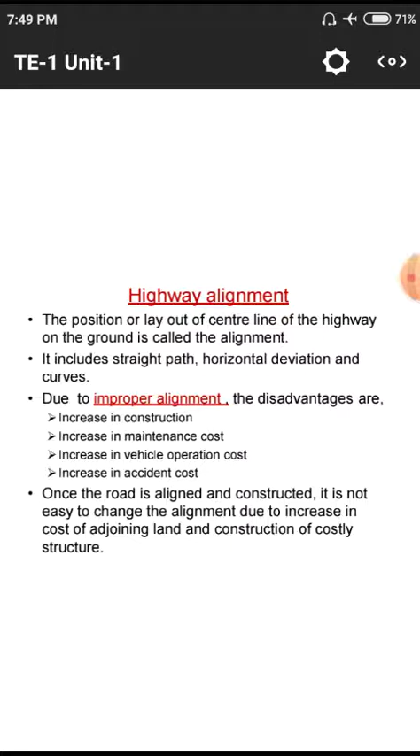And the last one is the increase of accident cost. That means if there is no proper design, no proper maintenance and no proper vehicular operation, those three are the major conditions for these accidents. Okay, to rectify the accidents, we need to maintain the top three conditions. These are the major alignment conditions and disadvantages.

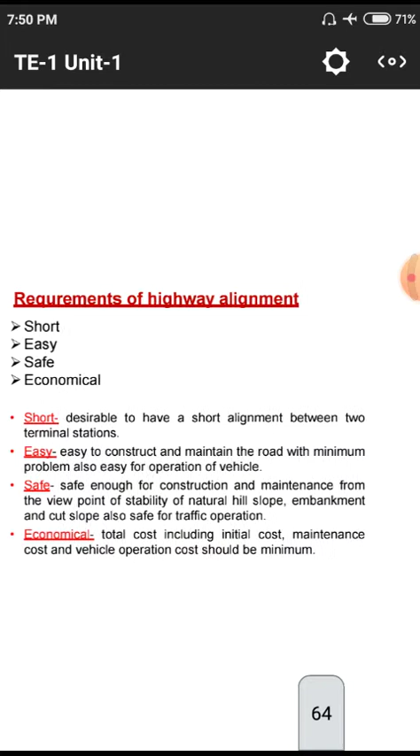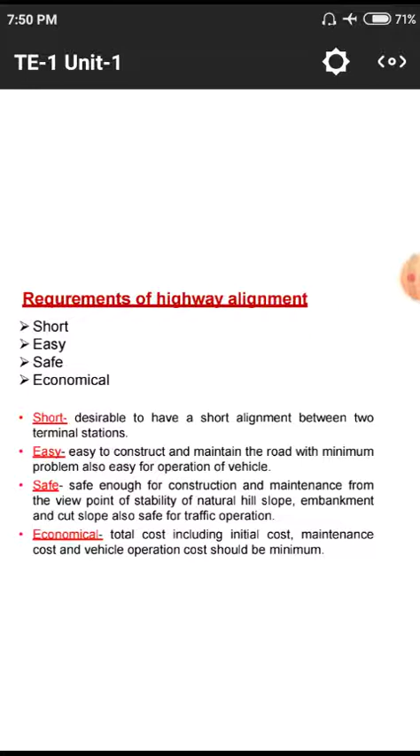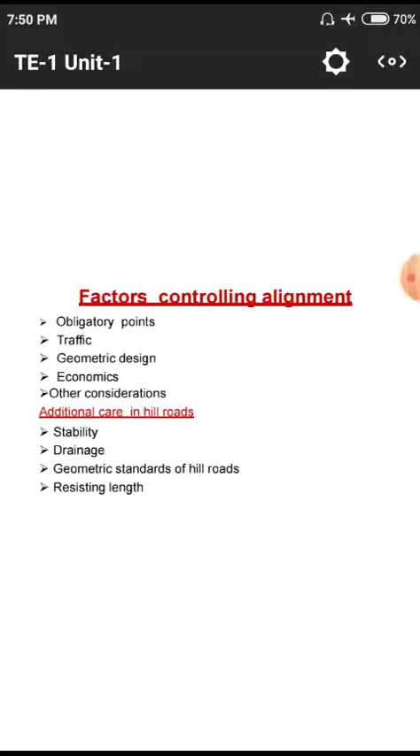Next, requirements of highways: short, easy, safe, and economical. As short as possible, easy to travel and understand, and it should be safe and economical to the users. Next, factors controlling alignments. The first one is obligatory points, different kinds of obligatory points. In the previous class we discussed churches, monuments, temples, and other things that lie beside the roads.

Those are mainly obligatory points to the particular roads. And next one is the traffic. That means origin and destination survey could be carried out by different kinds of traffic. In villages we have traffic majorly due to tractors and trolleys, because tractors and trolleys are the major means for transferring goods from lands, that means lands to their storages and other agricultural markets, so vehicular traffic is more due to these tractors and other carrying vehicles in villages.

Likewise in our cities we have traffic with cars, autos and two wheelers. These are the major traffic-causing vehicles in a city. But in case of national highways, major traffic vehicles are lorries, buses and other containers. These are the major traffic issues on the highway. So likewise we have different kinds of vehicles on different types of roads. Okay, we need to memorize those kinds of roads and types of vehicles which have different traffic values in

that particular roads. Origin and destination survey: before going to construct a particular building or any dam or any other road, we need to take a survey. Survey here is not related to anything else, it's simply related to our civil engineering matter. Before going to construct a particular dam, we need to take a survey of the surrounding villages, because constructing a dam means there can be a huge amount of floods. If floods are coming, neighboring villages will be affected because of the huge amount of water.

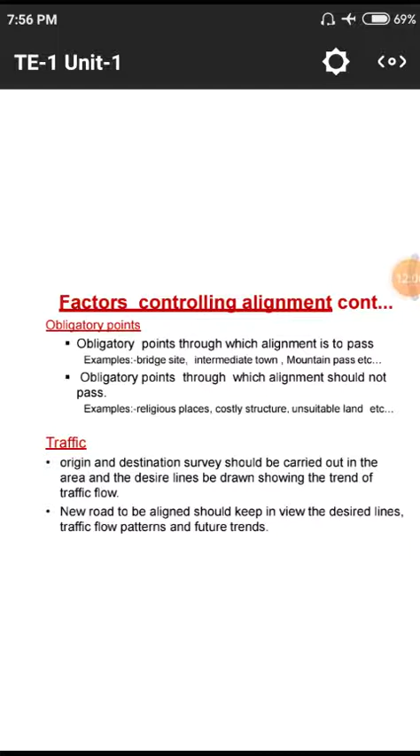Next, we didn't discuss these obligatory points. Once again we will discuss the obligatory points through which the alignment passes, such as bridges, intermediate towns, and mountain passes. In so many previous slides I explained these obligatory points or conflict points.

Whenever we are laying a particular road, if there are bridges and intermediate towns in between two villages or two cities, there are so many villages in between, so a few places in those villages need to be improved in terms of road quantity, so that those villages can be brought under these obligatory points.

Examples: religious places, as previously discussed, huge amounts of temples, mosques, and churches come under these religious places. And next, costly structures.

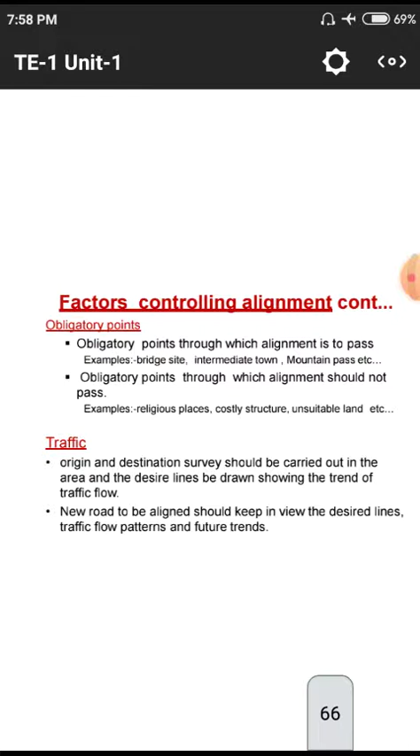Next one, geometric design. In the geometric design we have different kinds of factors we need to consider. First, design factors such as gradient, radius of curve, and sight distance.

First, gradient, that means this is the main slope we need to maintain in case of gradients, such as 1 in 20, 1 in 30, 1 in 40. These gradients need to be maintained while constructing a road, mainly to cater to drainage facilities.

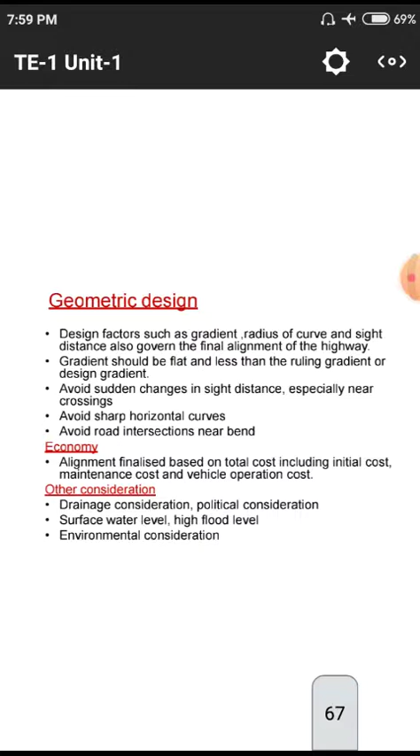And second is sight distance, that means if two or three roads join at a particular point, we need to take care about the sight distance, because if there is no sight distance for a particular driver, there may be a chance of huge accidents occurring. So sight distance plays a major role in preventing accidents, and it is one of the major issues considered under geometric design.

And next, governance of the final alignment of the highway. That means after considering all these points, we need to encounter all those points and fix the final way of these highways, with different kinds of plans for different situations we face while designing.

We need to explain to our higher officials what the obligatory point is, how we faced the problems, and what the minimum length is we are taking at those points. All this we need to explain, because everything depends on finance. Whenever we are getting finance, we are responsible to the higher officials at state level and central level planning commissions, because it's totally a money matter.

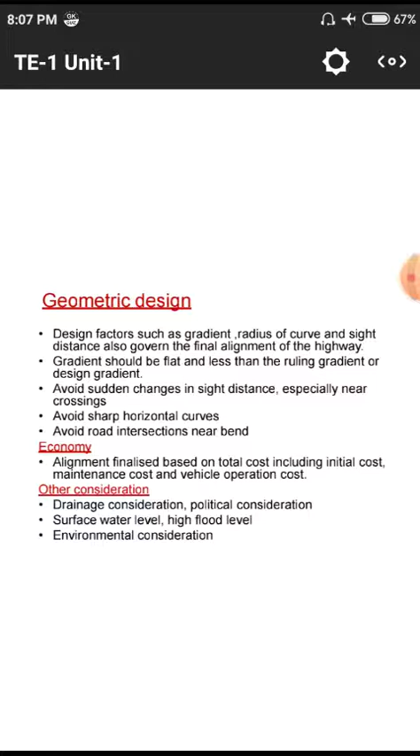We need to have a huge number of trees beside the road, so that whenever there are rains or high temperatures, vehicles and people can take a few minutes of rest on the particular roads. This is the importance of environmental considerations.

Next, topographical control points. Topography means whenever we observe a particular area with the help of drones and other pictorial views, we observe these topographical control points. Mainly these topographical control points depend upon the alignment.

That means whenever we are constructing a particular road, that road may have a huge amount of slope. If there is a huge amount of slope, automatically in rainy seasons the road will submerge with water, so we need to consider these topographical points.

Where possible, we should avoid passing through marshy and low lying lands with poor drainage. This is a major point. Marshy means wetlands, and low lying means the land is below drainage level. Poor drainage practices means without side canals and others, the total water flows on the roads, causing poor drainage conditions.

Whenever we have a road, we need to maintain side canals on that road to drain the water from the topmost surface to other areas.

Next, we need to observe flood prone areas. In some villages, states and cities, we face flood restrictions, like in Kerala. Every year Kerala faces huge amounts of floods. Similarly, Assam and Orissa have flood prone regions. At state and central level, we need to take care of these areas and construct different kinds of road practices to mitigate flood issues.

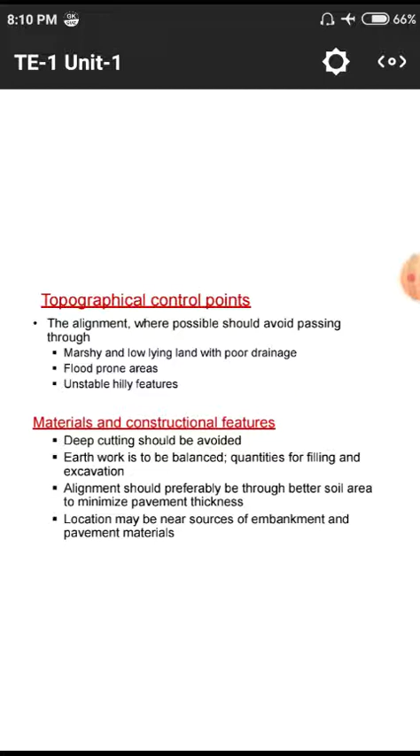Next, materials and constructional features. First, deep cutting should be avoided, meaning sudden turns. Suddenly having different kinds of turns on a road causes huge numbers of accidents. We need to change these sudden turns by implementing radial roads, meaning instead of constructing sudden turns, we construct radial roads so that we travel on a particular radius.

Next, earthwork should be balanced so that quantities of filling and excavation are managed. Earthwork means we need to maintain proper embankments without collapsing the roads, covering earthwork with filling materials and excavating where necessary. Excavation means removal of the top and side layers of earth. These excavation works normally take place in hilly areas to dredge granite and other mining materials.

The excavated material is used for filling on different roads wherever there is a need for filling. The third point is that the alignment should preferably go through better soil areas to minimize pavement thickness.

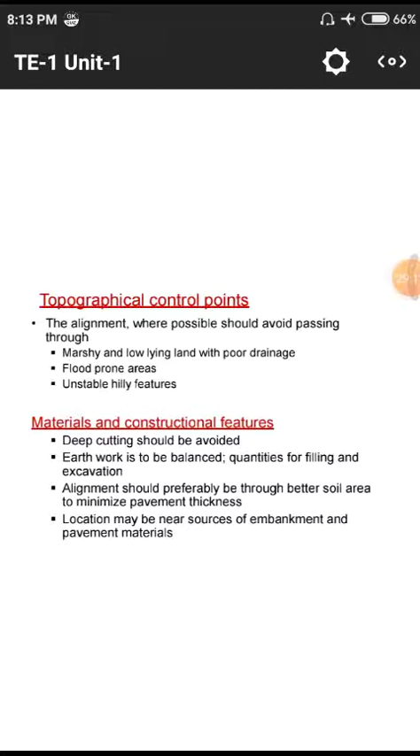Next, the location should be near sources of embankment and pavement materials. If materials are locally available, we reduce transportation charges. If not local, we need to bring materials from other states or villages, and then we face huge transportation charges for construction of embankments and pavements.

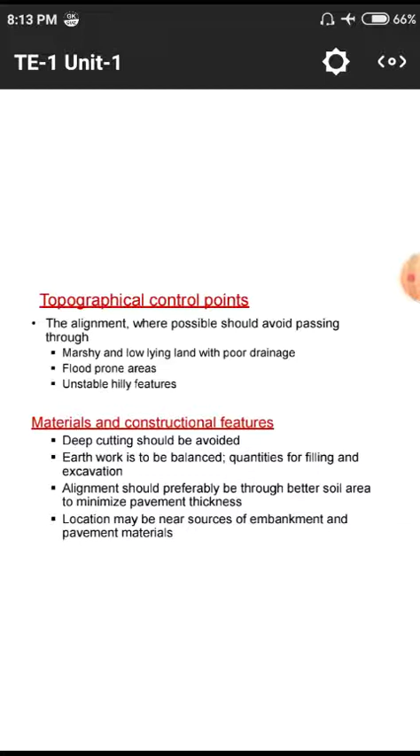Next, we need to do a study on stability. Stability means if there is no stability in our planning, we will have to think through different kinds of actions.

If there is proper stability, we will go on with a particular activity. Like that, if there is particular stability to that land, when we construct a road once, it will withstand for so many years. If there is no stability for that particular land, you need to construct it twice or thrice in its lifespan. That means every 2 or 3 years we need to reconstruct those particular roads because of this stability criteria. It is a common problem in hilly areas due to these gravitational problems and landslides.

Those landslides occur mainly due to gravity. If there is a huge amount of gravity on that particular area, automatically the land will slide to lower lying areas. And cutting and filling of earth for constructed roads in slides causes steepening of slope. Whenever there is a slope, automatically these lands slide due to these gravity actions. So that stability criteria mainly depends upon gravitational principles and gravity rules.

And next one, drainage. We previously discussed it already. We have to mitigate these drainage issues by constructing different kinds of side canals and others, and a number of cross drainage works we need to maintain to minimize the drainage problems.

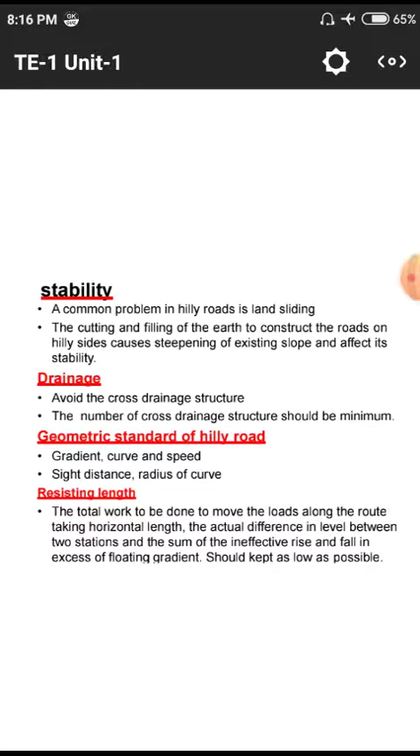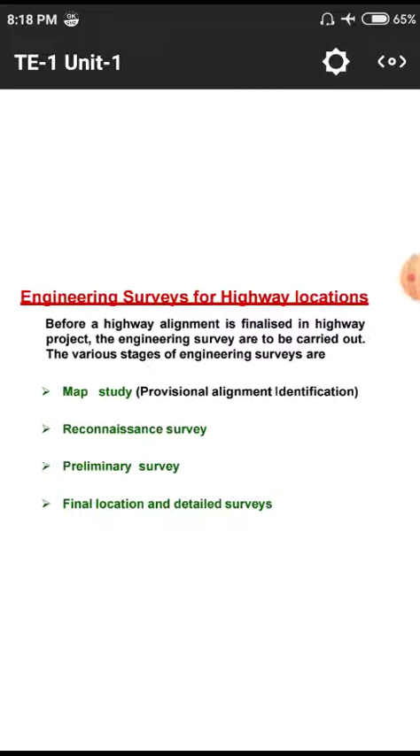This is the map study. Different kinds of rivers, ponds, lakes and other forests, hilly areas, topographical places, monuments, all we need to study by using these map studies. Yes, simply.

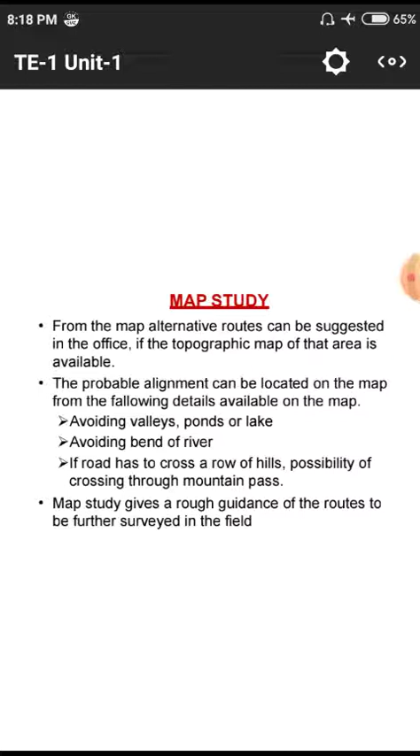And next one, reconnaissance survey. Reconnaissance survey means it will confirm the features indicated by the map, that means different kinds of monuments or any other. To examine those, we need to travel through different feasible points and fix different feasible routes without affecting those. And a survey party may inspect.

Survey party means, it's not a party as in an enjoying party. That means there are 4 to 5 members in that party. They have to visit throughout the length of the road and finalize the points where we have to do construction.

And next one, details collected of the alternative routes during those surveys that a party can prefer, describing the different kinds of routes we need to choose, like avoiding obstructions such as valleys, ponds, marshy land, hills, and permanent structures like temples, mosques, churches, and other obstructions.

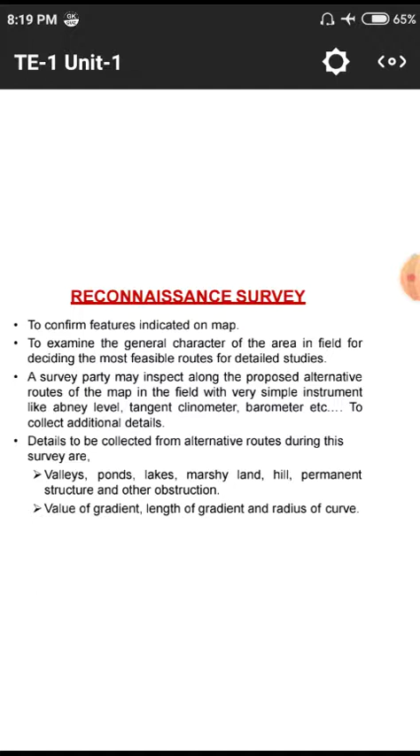If there are any such places nearby, we need to choose those. And the soil characteristics, that means SBC of the soil, safe bearing capacity, and geological features, that means folds, faults, unconformities, and other seismic prone areas. All those come under these geological features. Soil characteristics means rock strata or normal strata, alluvial soil, or any other.

And source of construction materials, what we have in nearby areas. Normally for laying cement roads, we need to know about quarries, like quartzite or any other materials, whether those are naturally available or we need to transport them from other places. We need to check all those conditions and prepare the project report on the merits and demerits of that particular route.

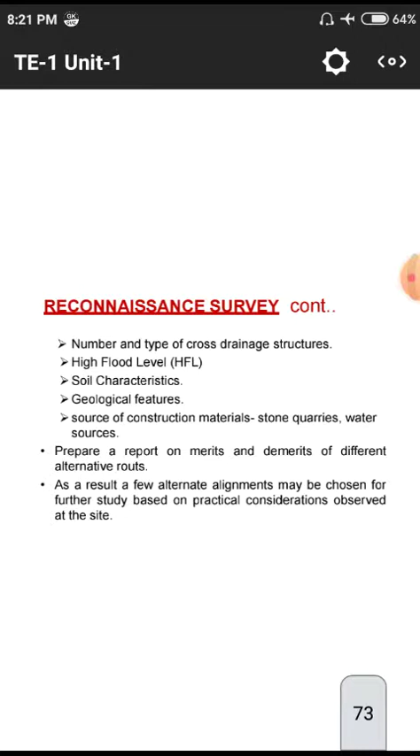Alternative alignments may be chosen for further study based upon the practical considerations observed at the site. That means based on particular conditions, we need to arrange for different kinds of studies. Next one, preliminary survey. Preliminary survey means the survey of various alternative alignments proposed after the reconnaissance and map study, collecting physical information and detailed topography and drainage and soil. We already discussed topographical survey, drainage, all those.

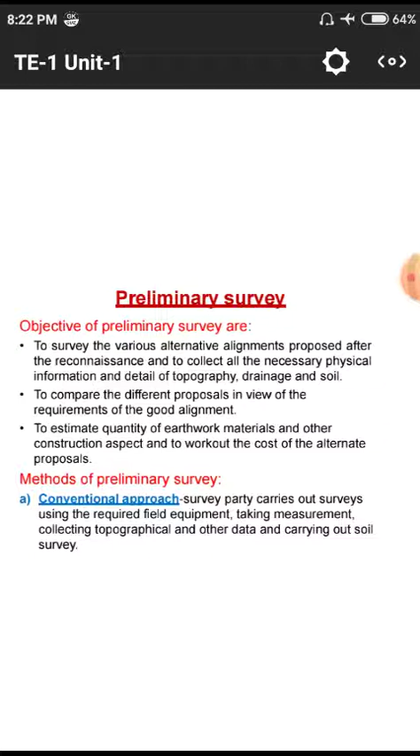Next one is comparing different proposals. Third one is the estimation of the quantity of earthwork we have to do. The preliminary survey has a conventional approach. That means the survey party carries out surveys using the required field equipment, taking measurements, collecting topographical data, and other soil surveys. All those we discussed in the previous slides. Plain terrains, rolling terrains, and hilly terrains, all these terms we will study in survey engineering, with drainage, hydrological survey, and others.

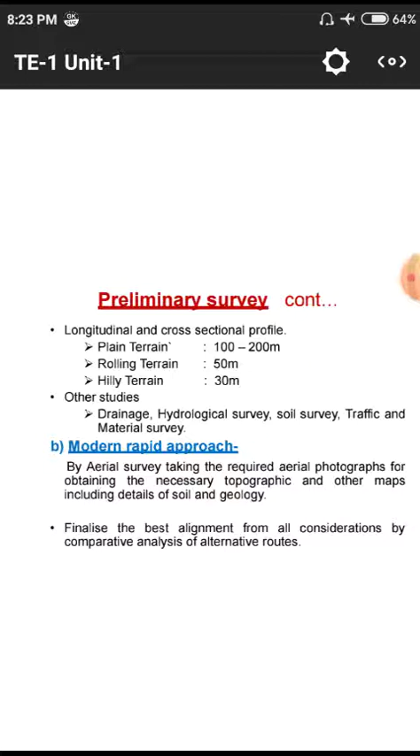Coming to the preliminary approach, the second one is a modern rapid approach. In this, aerial survey takes place with aerial photographs, obtaining different kinds of topographies, maps, and detailed soil and geological features. They finalize the alignment by comparative analysis: for each option, what is the total cost of the project? Likewise, cost wise, feature wise and obstruction wise, they do comparative studies and finalize the better way to construct. Next one is the final location and detailed survey.

The alignment is finalized after considering different features and designs, after the preliminary survey, reconnaissance surveys and map studies, establishing center lines for construction of the road. After that, the location survey transfers the alignment to the ground. Up to now we are doing surveys only on paperwork. After that, we go to the ground and locate the points on the land. This is done using a theodolite, an equipment that measures both horizontal and vertical angles.

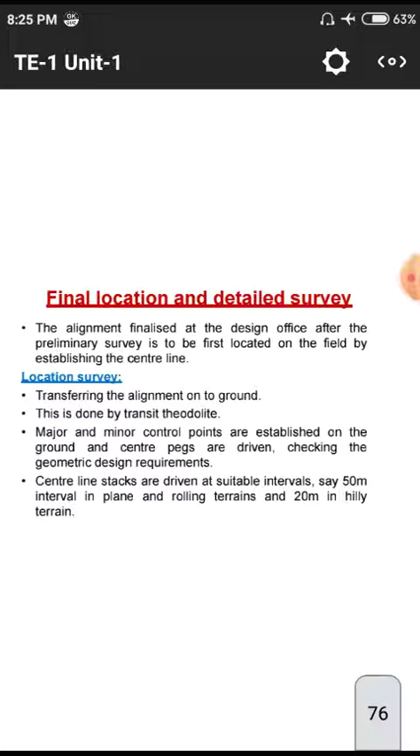Okay, we will end today's session with this final location and others. In the next class, we will discuss a few more points.